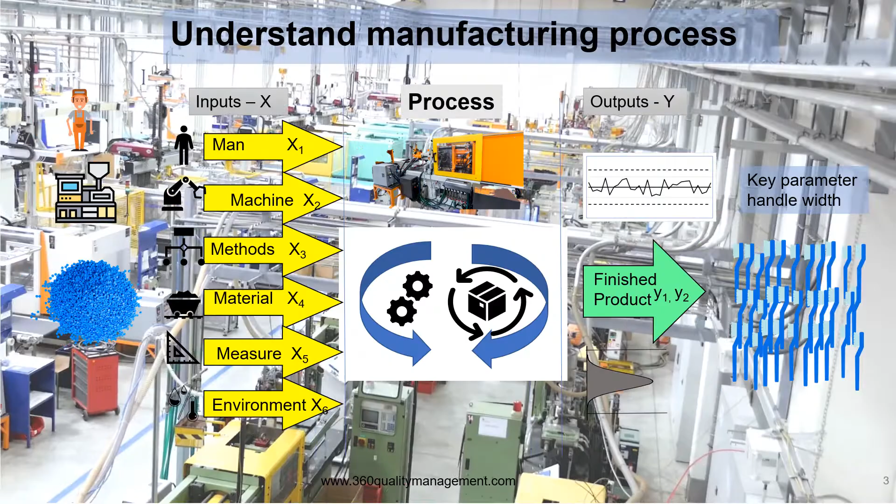After we know manufacturing as a process, where each consists of process input, the work or transformation process, and the output, we should be able to understand measurement as a process, where it also consists of process inputs, the process itself or the work activities or the transformation process, and the output, which is the measurement data.

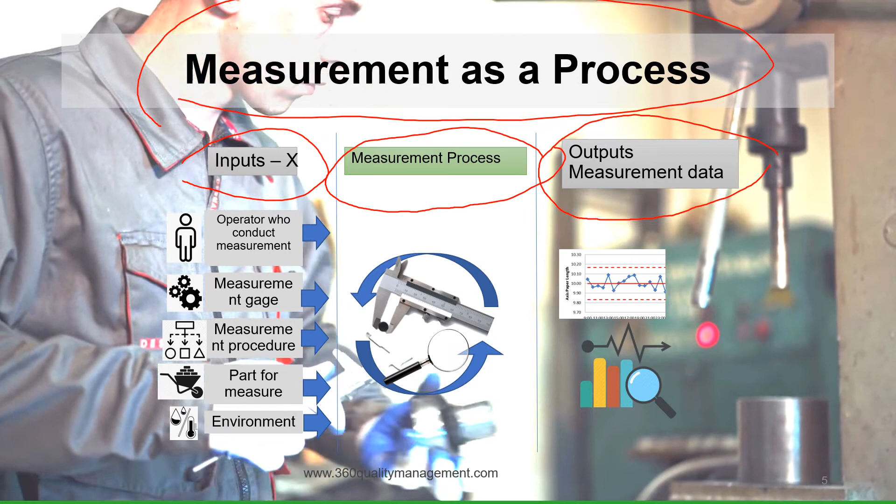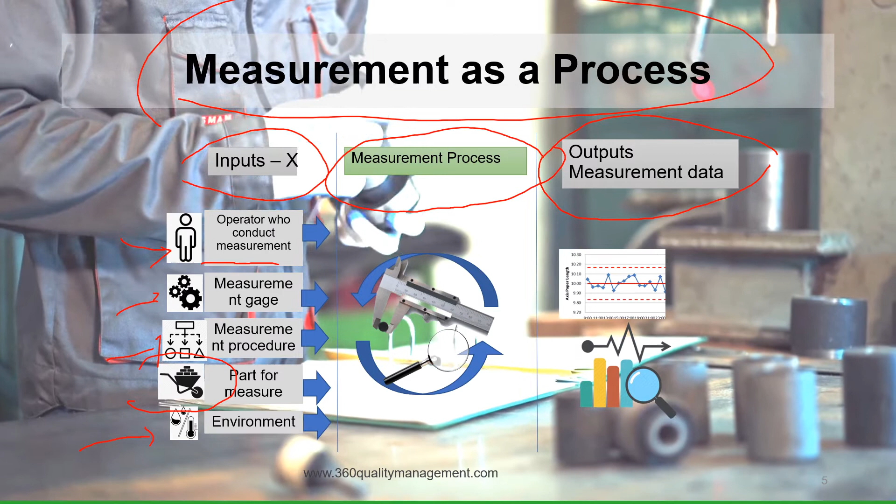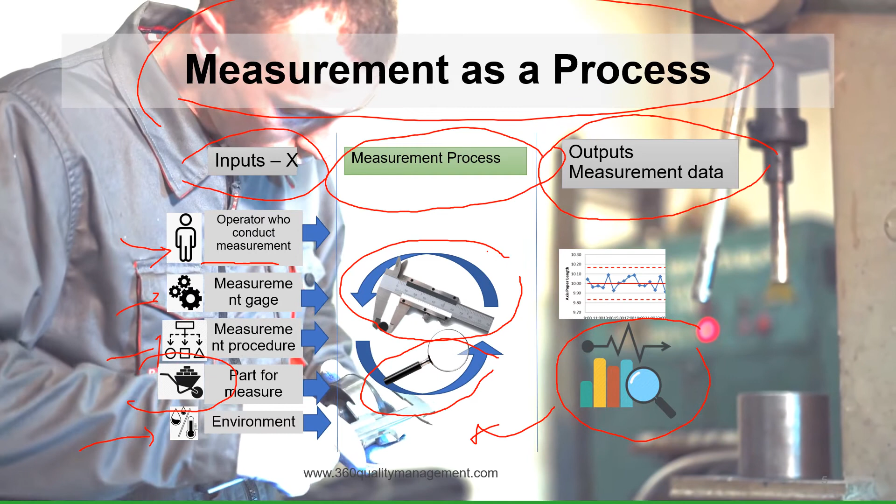The process inputs of a measurement process consist of an operator that conducts the measurements, the measurement gauge or the judgment, the measurement procedure itself, the parts or the samples for measurement, and also the environment that it is measured in, such as the lighting condition, and the instruments used for measuring, which could be a measurement gauge or a judgment or the eye of the operator or even a magnifying glass, and also the measurement data itself, the data that's collected from the process. So this is the overview of measurement as a process.

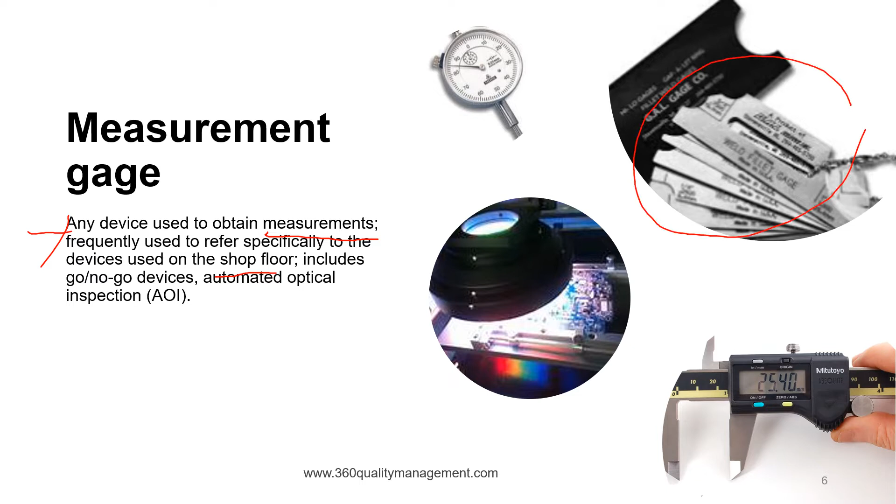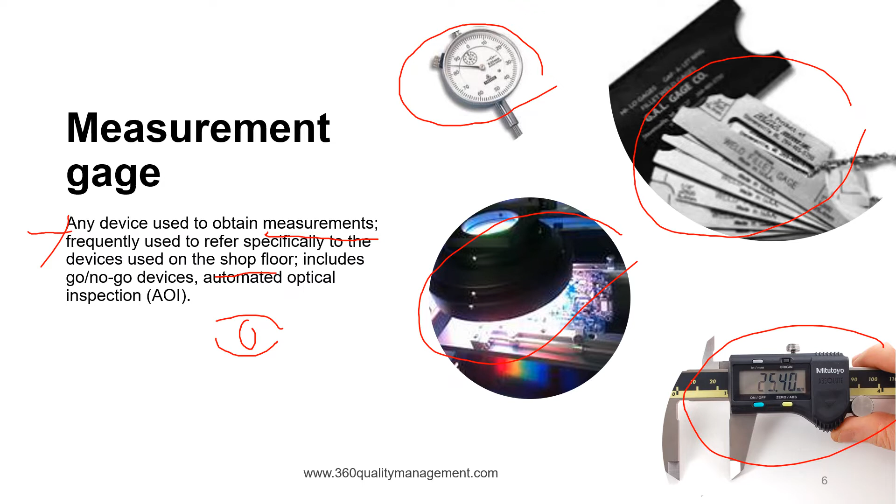Let's go through what measurement gauges are in this slide. It is actually any device that is used to obtain measurements, frequently referring to devices used in the manufacturing area or the shop floor, which could include a go-no-go gauge like a feeler gauge, automated optical inspection, the dial gauge, and the vernier caliper, and even the eye of the operator is also a type of measurement gauge, where it is used to judge whether the parts comply or do not comply to certain specs or certain criteria.

We count, we inspect, judge, and evaluate items, and all of these activities are measurements with their own systems. When we plot a chart, it is actually called observed process variation, which could include both the real process variation itself, coming from the process inputs of man, machines, methods, materials, and even environment, and also the measurement error itself from the measurement process. So it is very important to quantify the accuracy and the precision of the measurement system.

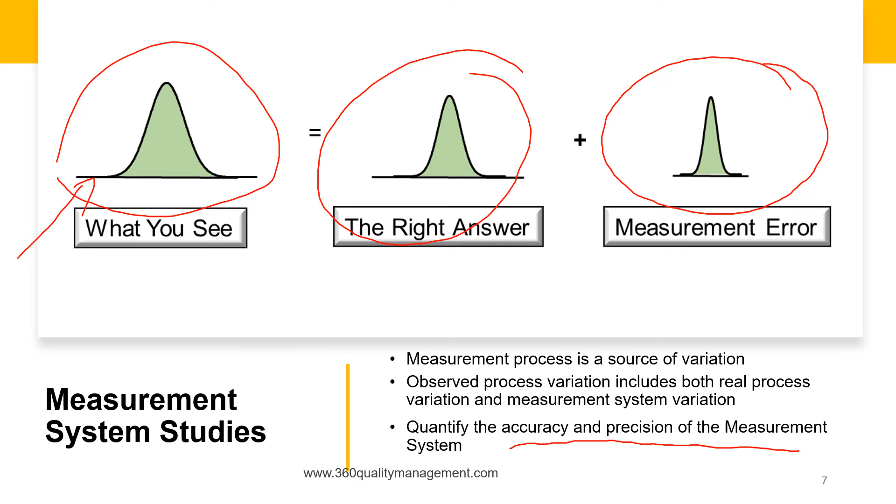How do we calculate the measurement error in our process? The purpose of measurement system studies is actually to isolate the measurement system error, known as measurement variation, from the total variation which we observe in the data that we collected. There is a way to calculate the variation that is associated with the measurement error, and from the calculation, we will need to know whether action can be taken to reduce the measurement error if it is not fulfilling the acceptance criteria before we continue the analysis of the data, as we do not want this component to have too much influence on the measurement.

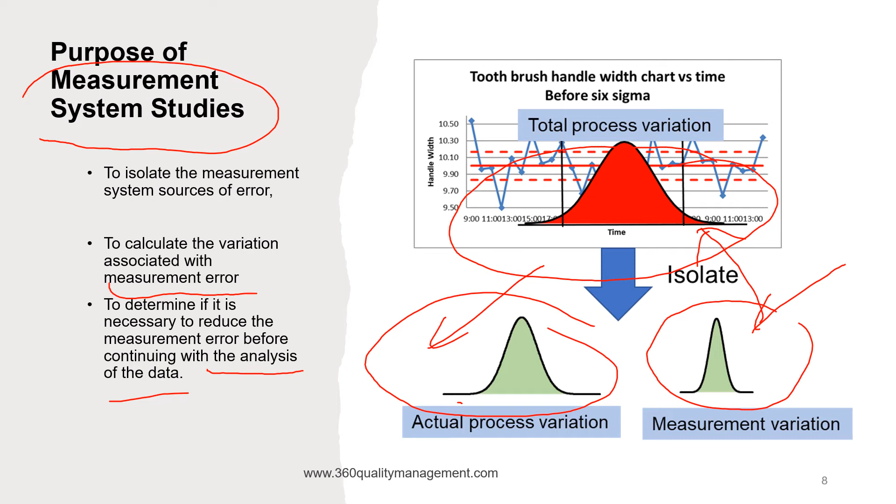That means the measurement variation should be as small as possible so that we can see the actual variation clearly. Just imagine that if you have a lot of measurement error in your variation, it means that you are seeing the errors in the measurement variation rather than the actual process variation. Measurement system analysis will help us to answer: do we trust our data? Because we are able to isolate the measurement variation from the total variation that we observe, as stated in the last slide.

As you know, accurate data is important to make good decisions. And if the variation of the measurement system is too big, we are supposed to improve it to a smaller variation or within the acceptable range. And from here, we can assure our data will be trustworthy enough to be used to make a decision.

I hope you have built a good foundation in understanding MSA, which will help you to decode those complicated GR&R calculations and also be able to handle any MSA related interview questions through this video.